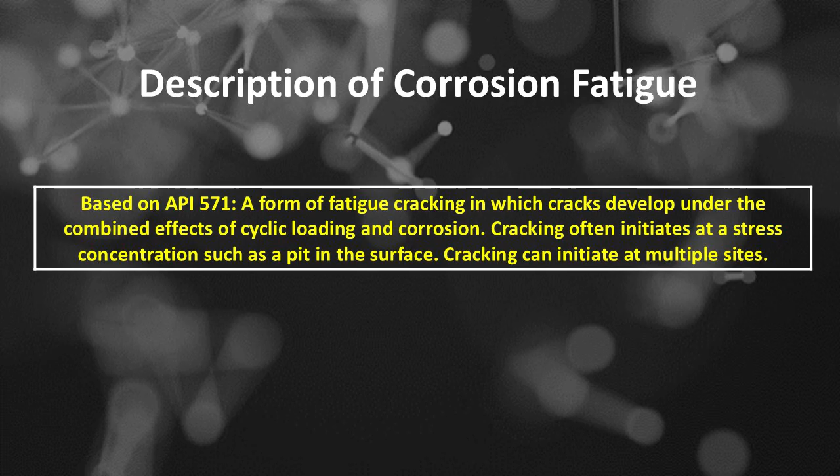Here's a detailed description of corrosion fatigue damage. Definition: corrosion fatigue is a failure mechanism that occurs when a material subjected to cyclic loading, repeated stress or strain, simultaneously experiences corrosive environmental conditions. The combined effect accelerates crack initiation and propagation, leading to premature failure of the material compared to corrosion or fatigue alone. Here is a comprehensive explanation of corrosion fatigue damage.

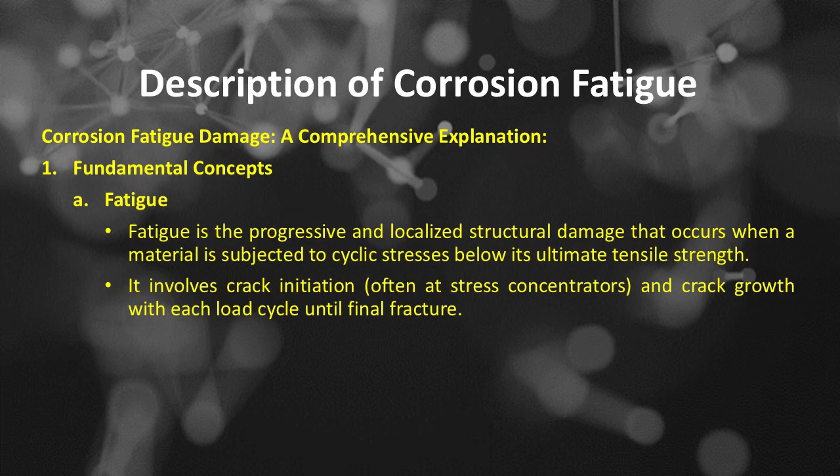Number 1 is fundamental concepts. Fatigue is the progressive and localized structural damage that occurs when a material is subjected to cyclic stresses below its ultimate tensile strength. It involves crack initiation, often at stress concentrators, and crack growth with each load cycle until final fracture. Corrosion involves the chemical or electrochemical deterioration of materials due to environmental interactions, leading to material loss, pitting, or weakening.

Corrosion fatigue is a synergistic process where cyclic stress and corrosive environment interact to accelerate material degradation, resulting in reduced fatigue life and increased likelihood of sudden failure. Number 2 is mechanisms of corrosion fatigue damage. Number A, crack initiation, typically occurs at surface flaws, inclusions, or areas of stress concentration. Corrosive environment exacerbates crack initiation by promoting localized attack, pitting, crevice corrosion, weakening the material's surface layer. Cyclic stresses tend to propagate these flaws into microcracks.

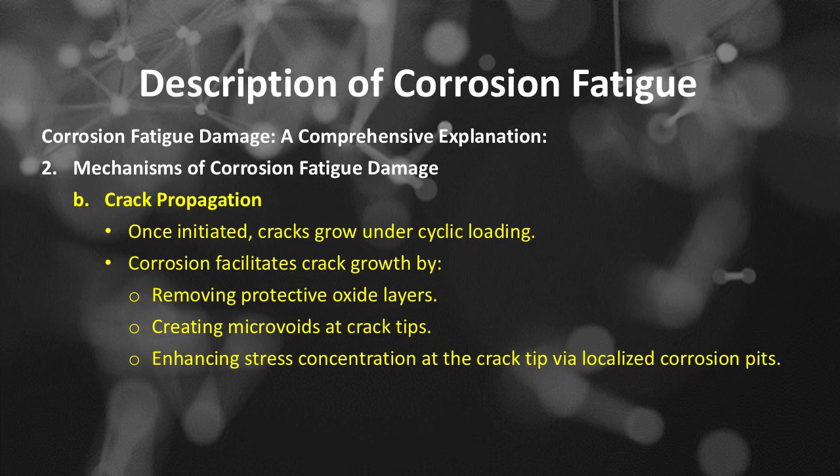Number B, crack propagation. Once initiated, cracks grow under cyclic loading. Corrosion facilitates crack growth by removing protective oxide layers, creating microvoids at crack tips, enhancing stress concentration at the crack tip via localized corrosion pits. Number C, synergistic effect. The presence of corrosion reduces the stress threshold required for crack growth. Cyclic stresses accelerate corrosion processes, and corrosion accelerates fatigue crack growth, creating a feedback loop.

There are some factors influencing corrosion fatigue. Factor number 1 is environment. Its effect is presence of chlorides, acids, or other aggressive agents intensifies damage. Factor number 2 is stress range. Its effect is higher cyclic stress amplitudes accelerate crack growth. Factor number 3 is frequency of loading. Its effect is lower frequencies allow more corrosion to occur per cycle, increasing damage.

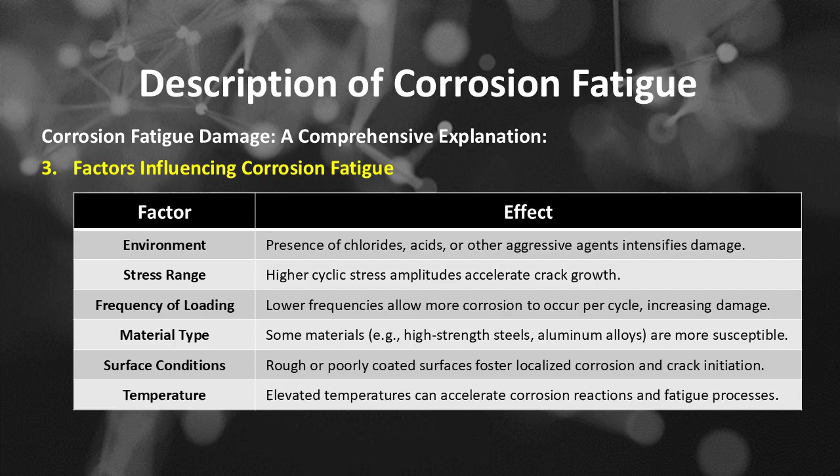Factor number 4 is material type. Its effect is some materials, for example high-strength steels and aluminum alloys, are more susceptible. Factor number 5 is surface conditions. Its effect is rough or poorly coated surfaces foster localized corrosion and crack initiation. And factor number 6 is temperature. Its effect is elevated temperatures can accelerate corrosion reactions and fatigue processes.

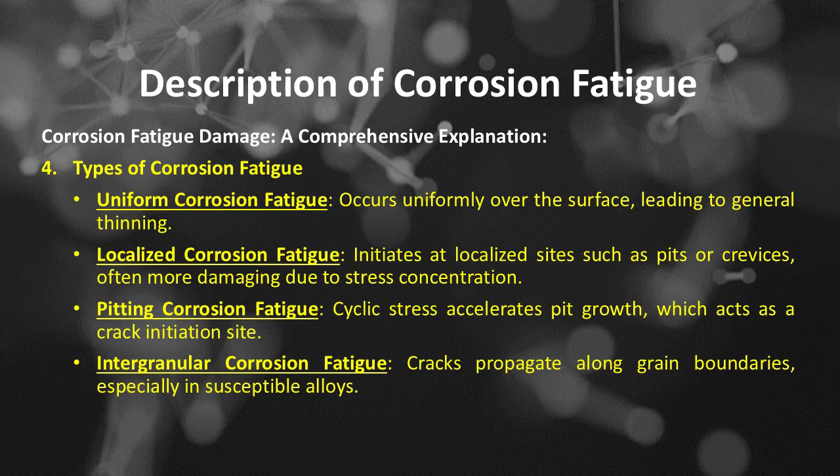Number 4 is types of corrosion fatigue. Uniform corrosion fatigue occurs uniformly over the surface, leading to general thinning. Localized corrosion fatigue initiates at localized sites such as pits or crevices, often more damaging due to stress concentration. Pitting corrosion fatigue: cyclic stress accelerates pit growth, which acts as a crack initiation site. Intergranular corrosion fatigue: cracks propagate along grain boundaries, especially in susceptible alloys.

Number 5 is damage characteristics. Crack initiation sites, often at surface flaws, corrosion pits, or inclusions. Crack growth, accelerated at corrosion sites, often with irregular or scalloped fracture surfaces. Fracture surface features: beach marks indicate incremental growth under cyclic loading. Corrosion products: presence of rust or corrosion deposits on fracture surfaces. Intergranular features: in some alloys, cracks propagate along grain boundaries.

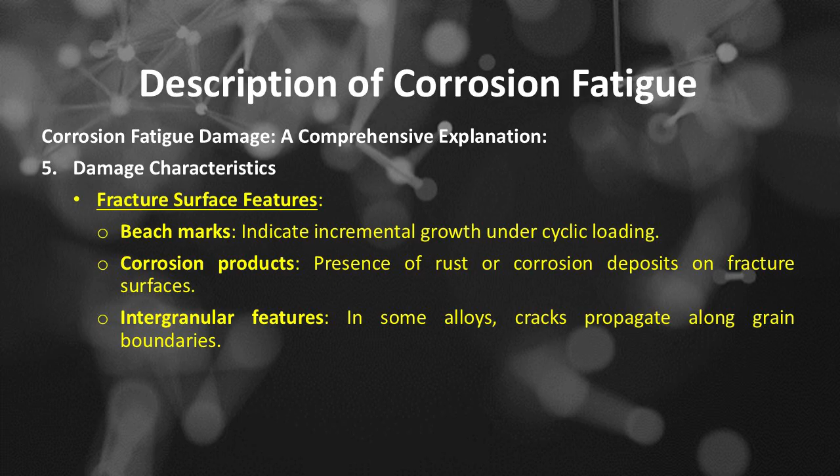Number 6 is detection and analysis using visual inspection, surface corrosion features and crack indication; microscopy, SEM to observe crack morphology and corrosion features at high magnification. Detection and analysis using non-destructive testing, ultrasonic testing, eddy current testing, and detection and analysis using fractography, analysis of fracture surfaces to distinguish between fatigue, corrosion, and combined damage modes.

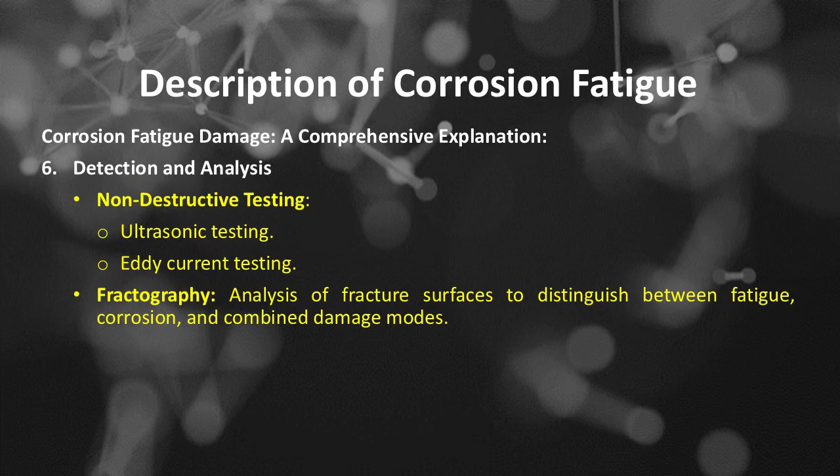Corrosion fatigue is a synergistic failure mechanism involving the interaction of cyclic mechanical stresses and corrosive environments that accelerate crack initiation and growth, often leading to premature failure. It is characterized by surface or subsurface cracks, corrosion pits, and scalloped fracture surfaces, with damage severity depending on environmental conditions, material properties, and loading parameters. Corrosion fatigue based on API 571 affects all metals and alloys.

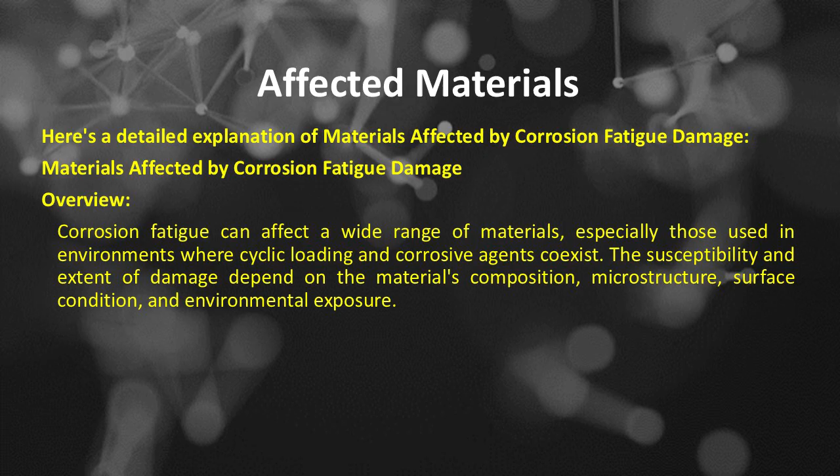Here's a detailed explanation of materials affected by corrosion fatigue damage. Overview: corrosion fatigue can affect a wide range of materials, especially those used in environments where cyclic loading and corrosive agents coexist. The susceptibility and extent of damage depend on the material's composition, microstructure, surface condition, and environmental exposure. Materials affected by corrosion fatigue damage include: number 1 is metals and alloys susceptible to corrosion fatigue.

Number A, steels. The first is carbon steels, commonly used structurally, susceptible to pitting and cracking in chloride environments. High-strength steels are particularly vulnerable due to their high residual stresses and microstructural features. The second is alloy steels, which contain alloying elements, Cr, Ni, Mo, that can improve corrosion resistance but may still suffer in aggressive environments.

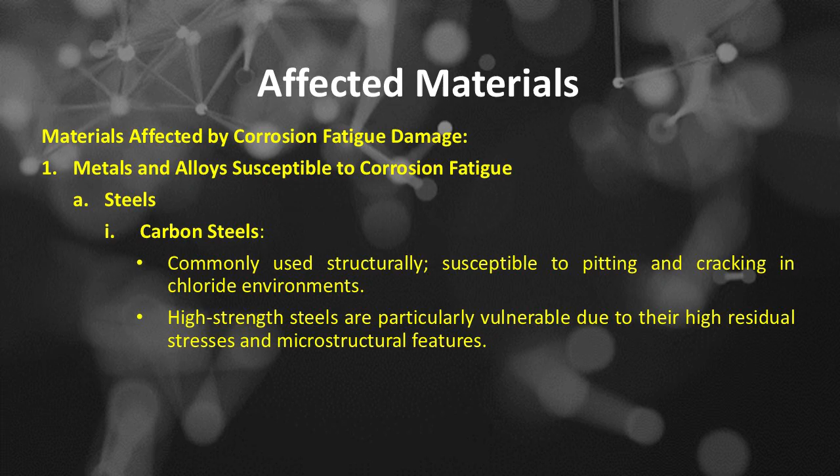The second part of steels is alloy steels, which contain alloying elements, Cr, Ni, Mo, that can improve corrosion resistance but may still suffer in aggressive environments. The third part of steels is stainless steels, generally resistant to corrosion but susceptible to chloride-induced pitting and crevice corrosion, which can initiate fatigue cracks. Types such as 304, 316, and 321 are commonly affected.

Metals and alloys susceptible to corrosion fatigue. Number B is aluminum alloys, widely used in aerospace, marine, and transportation, susceptible to pitting and intergranular corrosion, especially in chloride-rich environments. Fatigue life is significantly reduced when corrosion pits act as crack initiation sites.

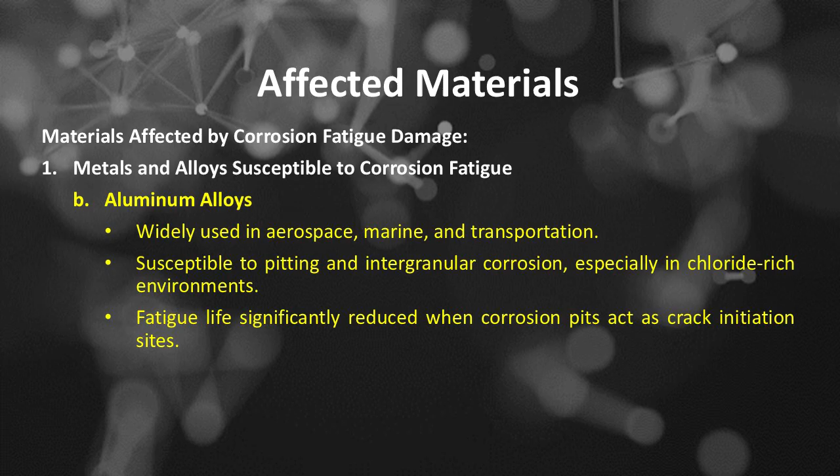Metals and alloys susceptible to corrosion fatigue. Number C is titanium alloys, known for excellent strength-to-weight ratio and corrosion resistance, still vulnerable in highly aggressive environments, especially if surface damage or microstructural defects exist. Pitting and localized corrosion can lead to fatigue failure.

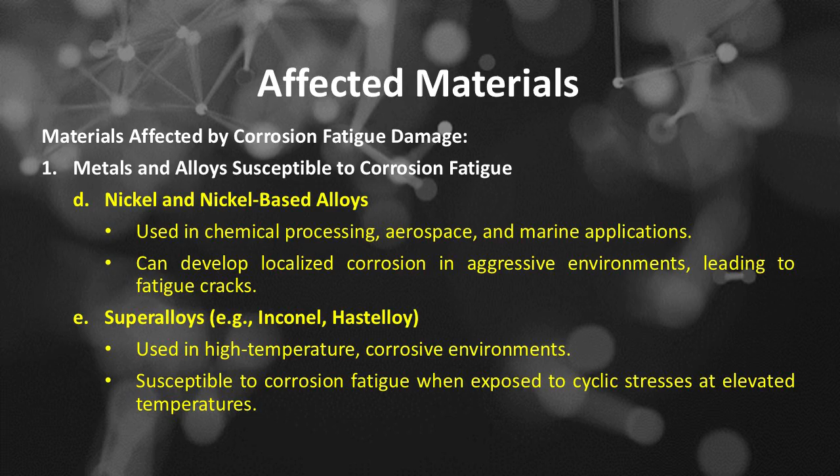Metals and alloys susceptible to corrosion fatigue. Number D is nickel and nickel-based alloys, used in chemical processing, aerospace, and marine applications, which can develop localized corrosion in aggressive environments, leading to fatigue cracks. Metals and alloys susceptible to corrosion fatigue. Number E is superalloys, such as Inconel, Hastelloy, used in high-temperature, corrosive environments. Susceptible to corrosion fatigue when exposed to cyclic stresses at elevated temperatures.

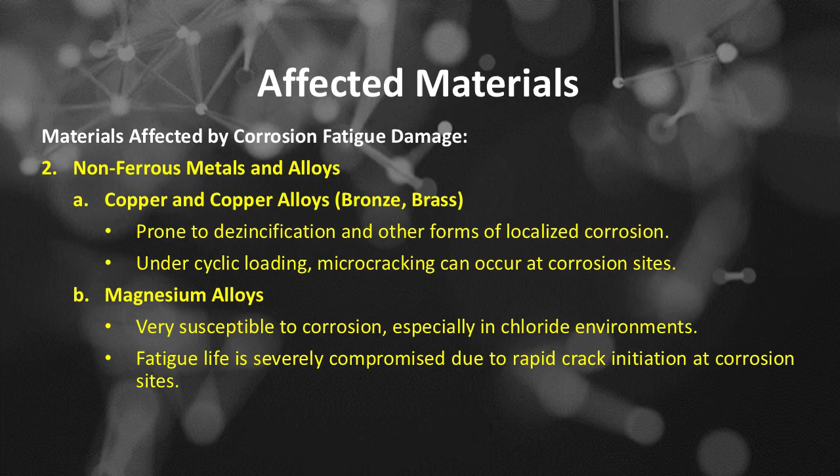Number 2 of materials affected by corrosion fatigue damage is nonferrous metals and alloys, which includes: number A, copper and copper alloys, bronze, brass, prone to dezincification and other forms of localized corrosion. Under cyclic loading, microcracking can occur at corrosion sites. Number B, magnesium alloys, very susceptible to corrosion, especially in chloride environments. Fatigue life is severely compromised due to rapid crack initiation at corrosion sites.

Number 3 of materials affected by corrosion fatigue damage is composite materials and coatings. Fiber-reinforced composites can suffer from environmental degradation at interfaces, leading to delamination and crack growth under cyclic loads. Protective coatings, such as paints, platings, can break down, exposing underlying materials to corrosion and fatigue.

Factors influencing material susceptibility. Factor number 1 is microstructure. Grain size, inclusions, and phase distribution influence crack initiation and propagation. Fine-grained microstructures generally improve fatigue resistance but may be more susceptible to localized corrosion if microstructural inhomogeneities exist. Factor number 2 is alloy composition. Elements like Cr, Ni, Mo enhance corrosion resistance but may introduce microstructural features that influence fatigue crack growth.

Factor number 3 is surface condition. Rough or damaged surfaces harbor corrosion pits that serve as crack initiation points. Factor number 4 is residual stresses. Welding, machining, or forming processes induce residual stresses that promote crack initiation in corrosive environments.

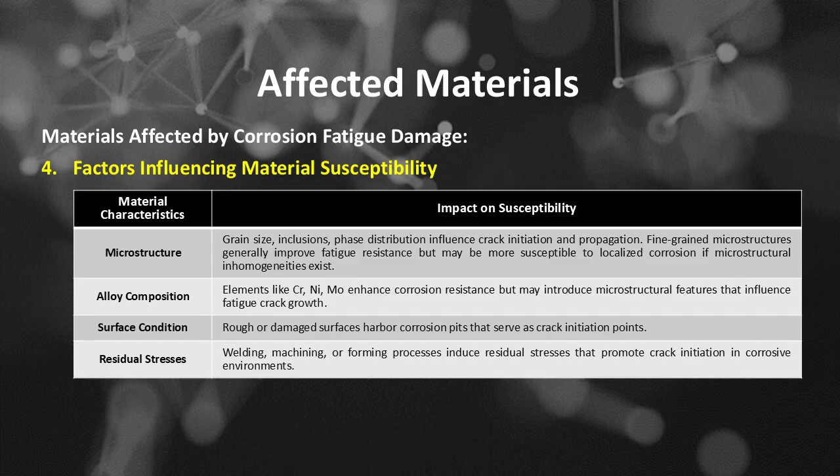Examples of materials commonly affected. Material type number 1 is carbon and low-alloy steels, typically applied to pipelines and structural components, susceptible to damage such as pitting and pitting-induced cracking in chloride environments. Material type number 2 is stainless steels, typically applied to marine structures and chemical plants, susceptible to damage such as pitting, crevice corrosion, and crack initiation at corrosion sites. Material type number 3 is aluminum alloys, typically applied to marine, aerospace, transportation, susceptible to damage such as pitting, intergranular corrosion, and fatigue cracks initiated at pits.

Material type number 4 is titanium alloys, typically applied to marine, aerospace, chemical processing, susceptible to damage such as localized corrosion under certain conditions and fatigue failure at corrosion sites. Material type number 5 is nickel alloys, typically applied to turbines and chemical reactors, susceptible to damage such as corrosion fatigue at high temperatures and aggressive environments.

Materials most vulnerable to corrosion fatigue are those that combine susceptibility to corrosion, due to microstructure, composition, or environment, and susceptibility to fatigue, high cyclic stresses, residual stresses. Commonly affected materials include carbon steels, stainless steels, aluminum alloys, titanium alloys, nickel-based superalloys, and certain non-ferrous metals. Localized corrosion forms, pitting, crevice corrosion, intergranular corrosion, are especially problematic, because they serve as crack initiation sites, dramatically reducing fatigue life.

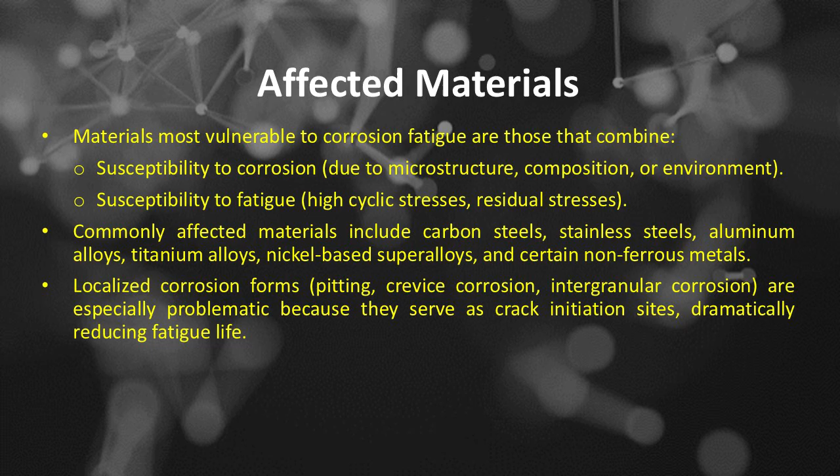Corrosion fatigue critical factors based on API 571. Number A, the critical factors are the material, corrosive environment, cyclic stresses and stress raisers. Number B, cracking is more likely to occur in environments that promote pitting or localized corrosion under cyclic stress due to thermal stress, vibration or differential expansion. Number C, contrary to pure mechanical fatigue, there is no fatigue limit load in corrosion-assisted fatigue. Corrosion promotes failure at a lower stress and number of cycles than the material's normal endurance limit in the absence of corrosion and often results in propagation of multiple parallel cracks.

Number D, crack initiation sites include concentrators such as pits, notches, surface defects, changes in section or fillet welds. Here's a detailed explanation of critical factors of corrosion fatigue damage. Corrosion fatigue is a complex failure process influenced by multiple interacting factors. Understanding these factors is essential for predicting, preventing, and mitigating damage in engineering components exposed to cyclic stresses in corrosive environments. Critical factors of corrosion fatigue damage. Number 1 is environmental conditions.

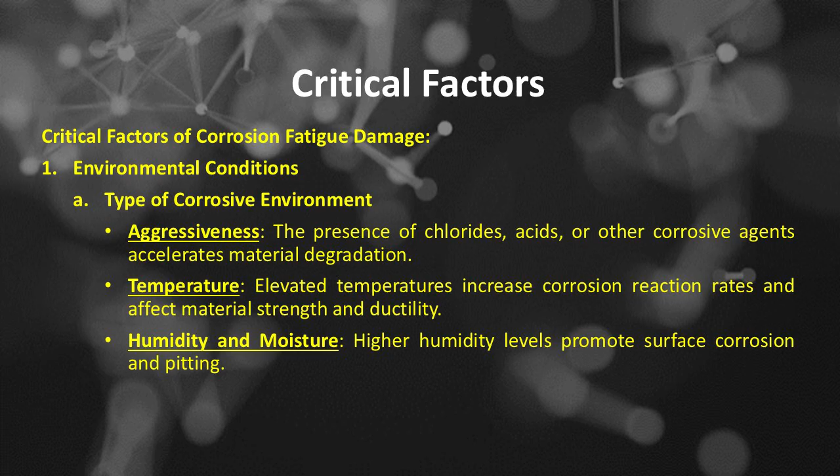Number A, type of corrosive environment, aggressiveness. The presence of chlorides, acids, or other corrosive agents accelerates material degradation. Temperature. Elevated temperatures increase corrosion reaction rates and affect material strength and ductility. Humidity and moisture. Higher humidity levels promote surface corrosion and pitting.

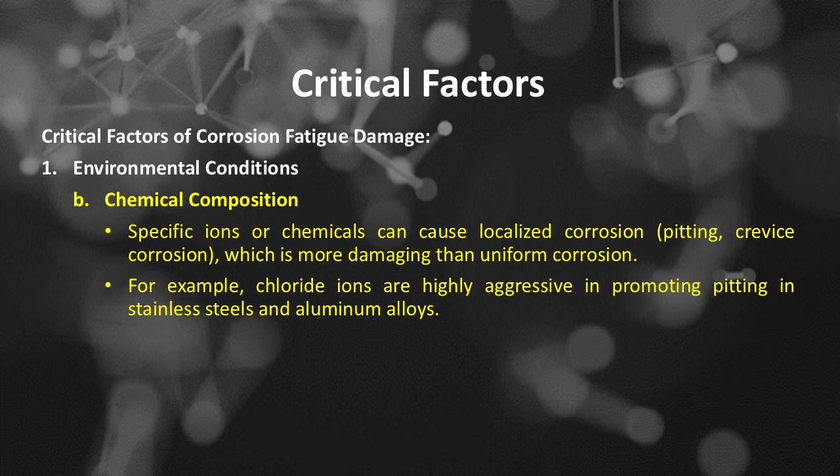Environmental conditions. Number B is chemical composition. Specific ions or chemicals can cause localized corrosion, pitting, crevice corrosion, which is more damaging than uniform corrosion. For example, chloride ions are highly aggressive in promoting pitting in stainless steels and aluminum alloys.

Environmental conditions. Number C is flow conditions. Turbulent flow or fluid movement can remove protective oxide layers, exposing fresh metal surfaces to corrosion. Conversely, stagnant conditions may promote crevice corrosion.

Critical factors of corrosion fatigue damage. Number 2 is mechanical loading parameters. Number A, stress range. The difference between maximum and minimum cyclic stresses influences crack initiation and growth. Higher stress ranges lead to faster crack growth and reduced fatigue life.

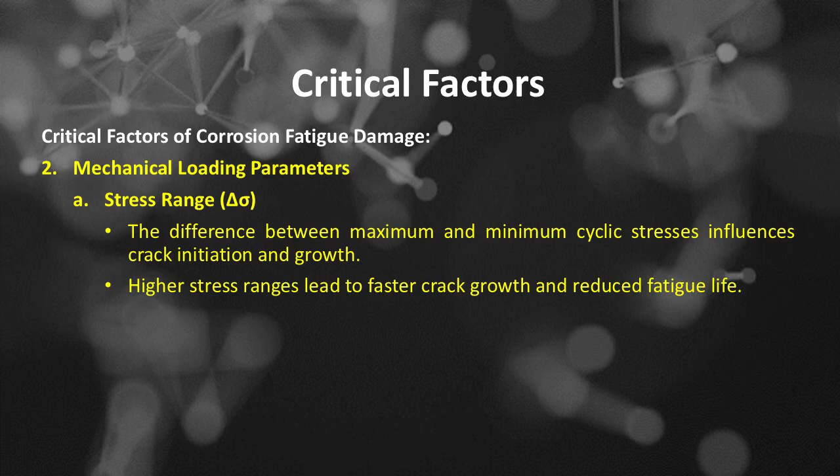Number B, stress concentration. Notches, welds, surface flaws, and geometric discontinuities amplify local stresses. These sites are preferential locations for crack initiation, especially under corrosive attack. Number C of mechanical loading parameters is loading frequency. Low frequency, more time per cycle for corrosion processes to occur, increasing damage. High frequency, less time per cycle for corrosion to act, but the combined effect may still be significant.

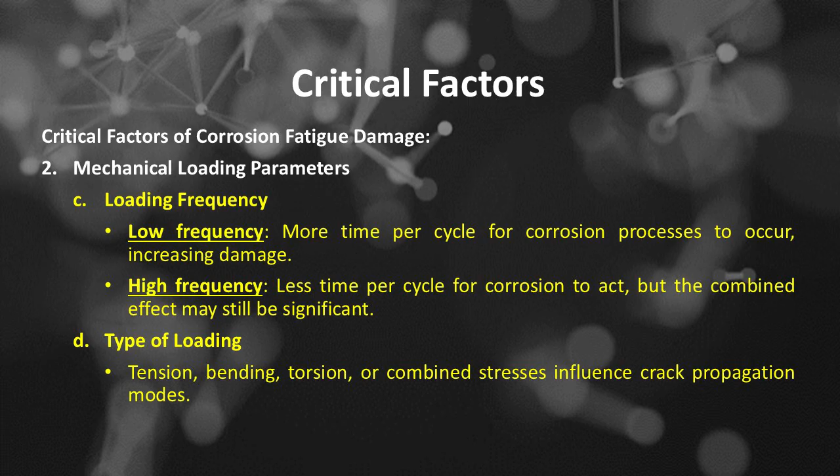And number D of mechanical loading parameters is type of loading. Tension, bending, torsion, or combined stresses influence crack propagation modes. Critical factors of corrosion fatigue damage. Number 3 is material properties. Number A, microstructure, grain size, phase distribution, and inclusion content affect crack initiation sites and pathways. Fine-grained microstructures generally improve resistance but may be vulnerable at microstructural defects.

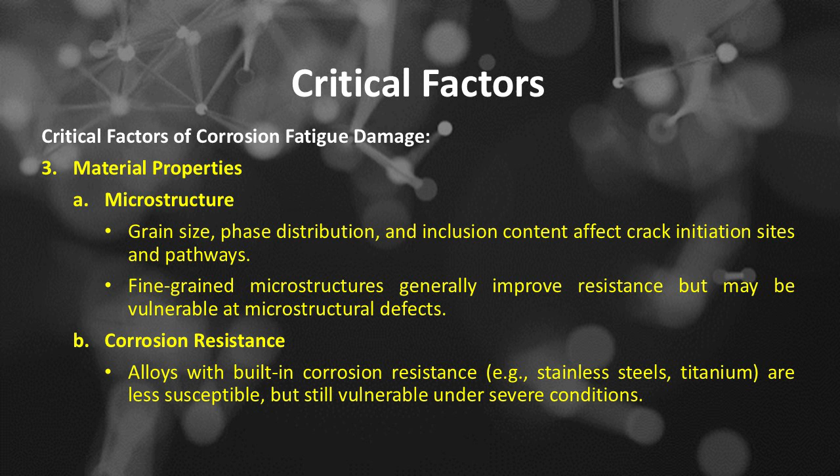Number B, corrosion resistance. Alloys with built-in corrosion resistance, for example stainless steels, titanium, are less susceptible, but still vulnerable under severe conditions. Critical factors of corrosion fatigue damage. Number 3 is material properties. Number C, residual stresses, induced by welding, forming, or machining processes. Residual tensile stresses promote crack initiation and propagation.

Material properties. Number D, hardness and ductility. Harder materials may resist crack growth but could be more brittle and prone to sudden failure. Ductile materials can absorb more energy but may still fail under localized corrosion attack. Critical factors of corrosion fatigue damage. Number 4 is surface condition. Number A, surface finish. Rough or damaged surfaces harbor corrosion pits and stress concentrators. Polished or coated surfaces reduce initiation sites.

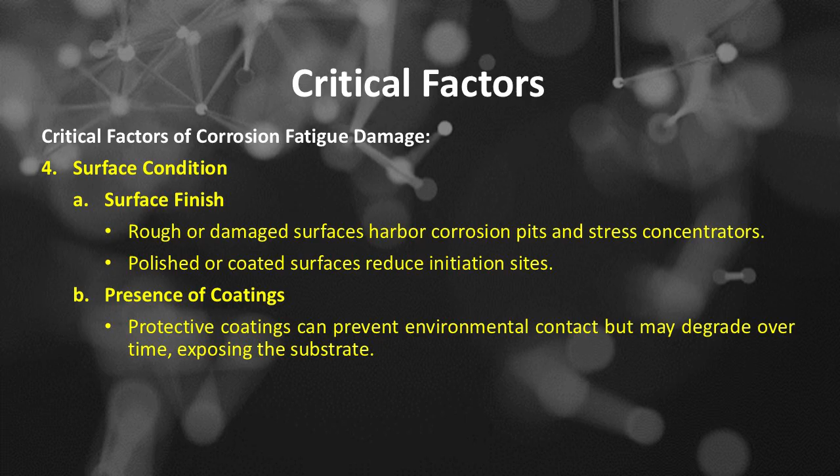Number B, presence of coatings. Protective coatings can prevent environmental contact but may degrade over time, exposing the substrate. Surface condition. Number C, pre-existing flaws, microcracks, inclusions, or corrosion pits act as crack initiation sites under cyclic stresses. Critical factors of corrosion fatigue damage. Number 5 is time and exposure duration. The duration of exposure to corrosive environments influences damage severity. Longer exposure allows more aggressive corrosion processes to develop and propagate cracks.

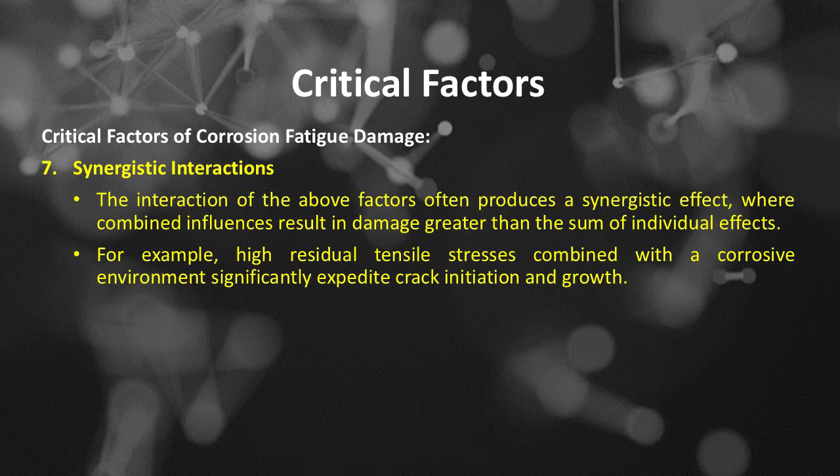Critical factors of corrosion fatigue damage. Number 6 is temperature. Elevated temperatures accelerate both corrosion reactions and material deformation processes. High temperatures may alter microstructure or weaken passive films, increasing susceptibility. Critical factors of corrosion fatigue damage. Number 7 is synergistic interactions. The interaction of the above factors often produces a synergistic effect, where combined influences result in damage greater than the sum of individual effects. For example, high residual tensile stresses combined with a corrosive environment significantly expedite crack initiation and growth.

The critical factors influencing corrosion fatigue damage are interconnected and collectively determine the susceptibility, initiation, and propagation of cracks leading to failure. Effective mitigation relies on understanding and controlling these factors through material selection, design optimization, environmental control, and maintenance practices.

Corrosion fatigue damage affected units or equipment based on API 571: rotating equipment, deaerators and cycling boilers, as well as any equipment subjected to cyclic stresses in a corrosive environment. Some examples include, Number A, rotating equipment. Galvanic couples between the impeller and the pump shaft or other corrosion mechanisms may result in a pitting problem on the shaft. The pitting can act as a stress concentrator or stress riser to promote cracking. Most cracking is transgranular with little branching.

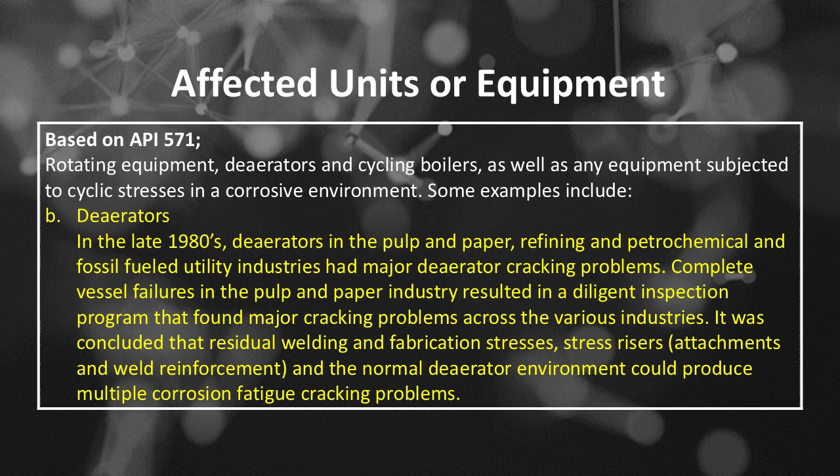Number B, deaerators. In the late 1980s, deaerators in the pulp and paper, refining and petrochemical and fossil-fueled utility industries had major deaerator cracking problems. Complete vessel failures in the pulp and paper industry resulted in a diligent inspection program that found major cracking problems across the various industries. It was concluded that residual welding and fabrication stresses, stress risers, attachments and weld reinforcement, and the normal deaerator environment could produce multiple corrosion fatigue cracking problems.

Number C, cycling boilers. A cycling boiler may see several hundred cold starts over its useful life which, because of differential expansion, continually cracks the protective magnetite scale, allowing corrosion to continue.

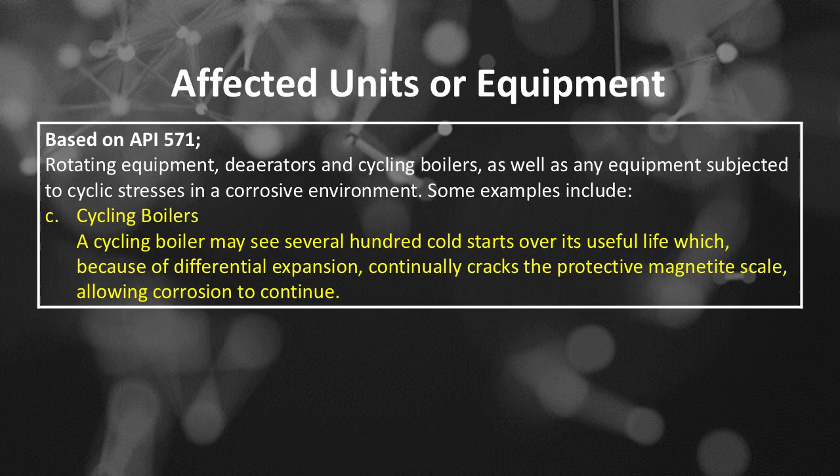Here is a detailed explanation of units or equipment affected by corrosion fatigue damage. Corrosion fatigue can compromise a wide array of structural components and equipment across various industries. Its impact is particularly critical in environments where cyclic stresses and corrosive agents coexist. Understanding which units are vulnerable helps in designing, maintaining, and inspecting these systems effectively. Units and equipment affected by corrosion fatigue damage. Number 1 is aerospace industry.

Number A, aircraft structures, includes: the first is fuselage frames and skin panels, subjected to cyclic aerodynamic loads, susceptible to pitting corrosion, especially in humid or saline environments. The second is wings and spars, which experience repeated bending and torsion. Corrosion pits can initiate cracks leading to fatigue failure.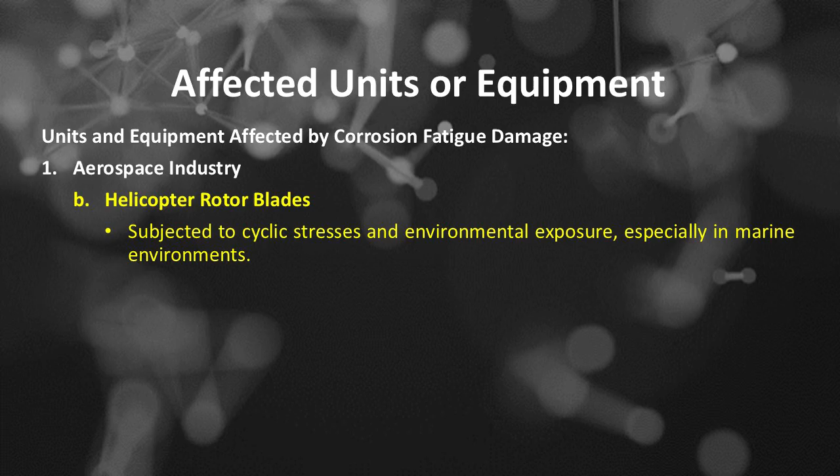Number B of unit or equipment from aerospace industry is helicopter rotor blades, subjected to cyclic stresses and environmental exposure, especially in marine environments. Number 2 of units and equipment affected by corrosion fatigue damage is maritime and offshore structures, includes: number A, ship hulls, continuous cyclic loading from waves, corrosive saltwater environment promotes pitting and cracking.

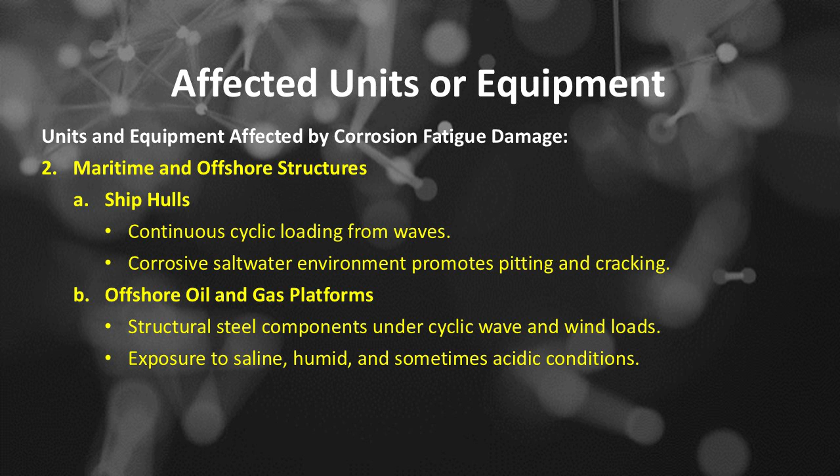Number B, offshore oil and gas platforms, structural steel components under cyclic wave and wind loads, exposure to saline, humid, and sometimes acidic conditions. Maritime and offshore structures equipment. Number C, propellers and shafts, subjected to repetitive stresses; corrosion pits can serve as crack initiation sites, leading to failure.

Number 3 of units and equipment affected by corrosion fatigue damage is automotive and transportation, includes: number A, vehicle frames and chassis, cyclic loading from road vibrations, exposure to road salts and environmental moisture causes corrosion fatigue. Number B, railway tracks and components, repeated stresses from trains; corrosion and fatigue combine to cause cracks and failures.

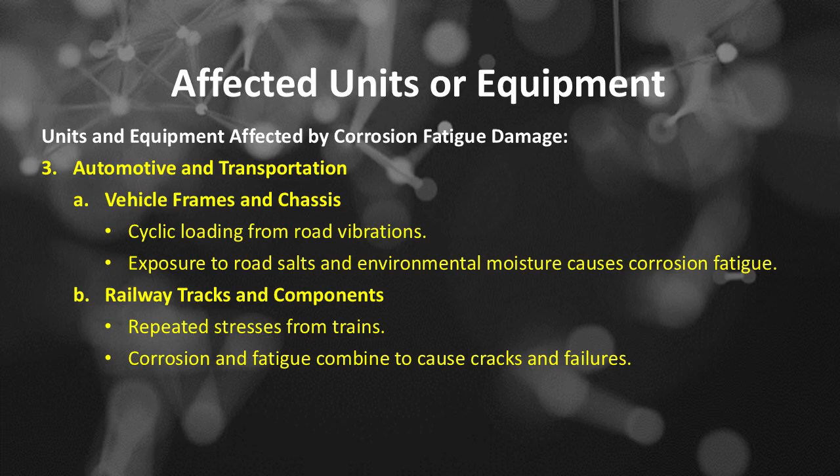Automotive and transportation equipment. Number C, aircraft and train components, similar to aerospace, with emphasis on high-stress parts subject to environmental exposure. Number 4 of units and equipment affected by corrosion fatigue damage is power generation equipment, includes: number A, steam turbine blades and discs, high cyclic stresses at elevated temperatures, corrosive environments from steam and combustion gases.

Number B, nuclear reactor components: piping, pressure vessels, and core components experience cyclic thermal and mechanical stresses. Corrosive coolant environments, water, boric acid solutions, contribute to damage. Power generation equipment. Number C, hydropower turbines, cyclic loading from water flow; corrosive water environments can induce fatigue cracks.

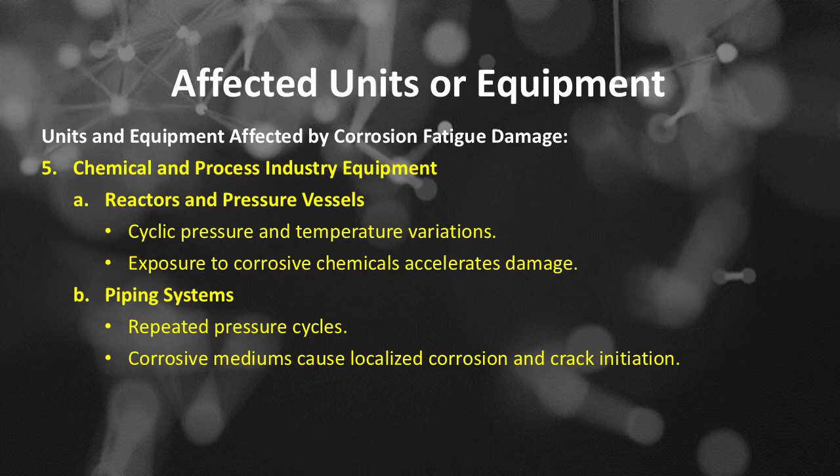Number 5 of units and equipment affected by corrosion fatigue damage is chemical and process industry equipment, includes: number A, reactors and pressure vessels, cyclic pressure and temperature variations, exposure to corrosive chemicals accelerates damage. Number B, piping systems, repeated pressure cycles, corrosive mediums cause localized corrosion and crack initiation. Chemical and process industry equipment. Number C, heat exchangers, cyclic thermal expansion and contraction, corrosive fluids lead to pitting and fatigue failure.

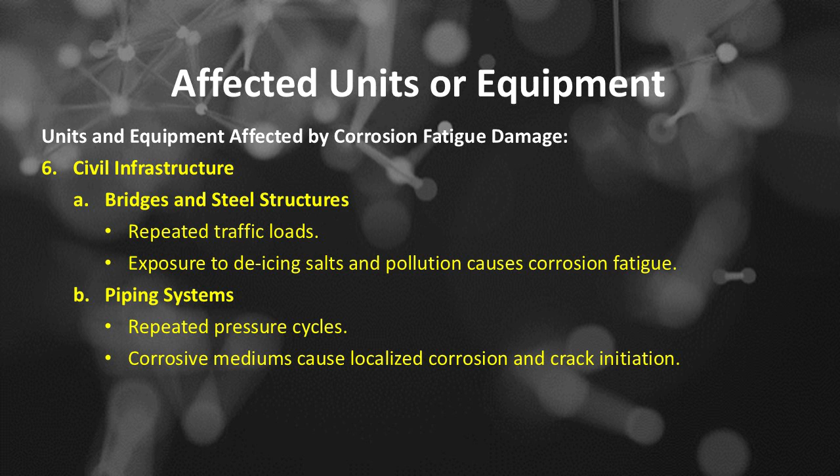Number 6 of units and equipment affected by corrosion fatigue damage is civil infrastructure, includes: number A, bridges and steel structures, repeated traffic loads, exposure to de-icing salts and pollution causes corrosion fatigue. Number B, dam gates and penstocks, cyclic loading from water pressure; corrosion in water-rich environments enhances crack development.

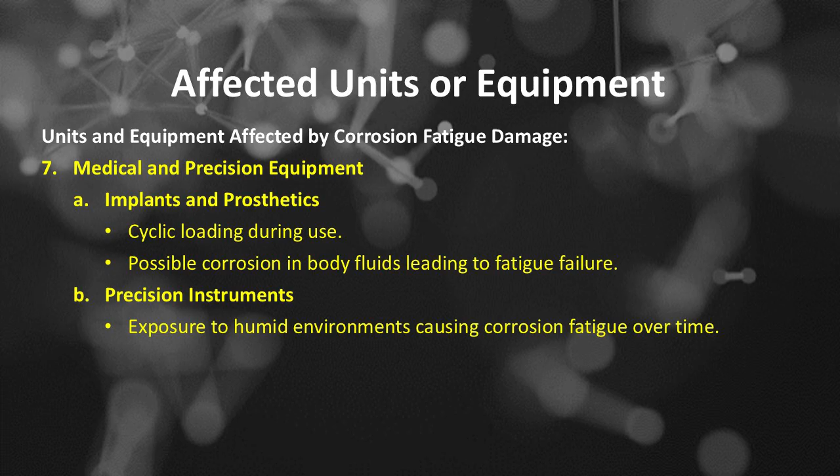Number 7 of units and equipment affected by corrosion fatigue damage is medical and precision equipment, includes: number A, implants and prosthetics, cyclic loading during use, possible corrosion in body fluids leading to fatigue failure. Number B, precision instruments, exposure to humid environments causing corrosion fatigue over time. Corrosion fatigue can affect virtually any unit or equipment subjected to cyclic stresses in a corrosive environment.

Critical areas include structural components of aircraft, ships, and bridges; mechanical parts like turbines, propellers, and gears; pipelines, pressure vessels, and heat exchangers; civil infrastructure components exposed to environmental conditions; specialized equipment in chemical, power, and medical sectors. Mitigation strategies include selecting corrosion-resistant materials, applying protective coatings, designing to minimize stress concentrations, and implementing regular inspection programs.

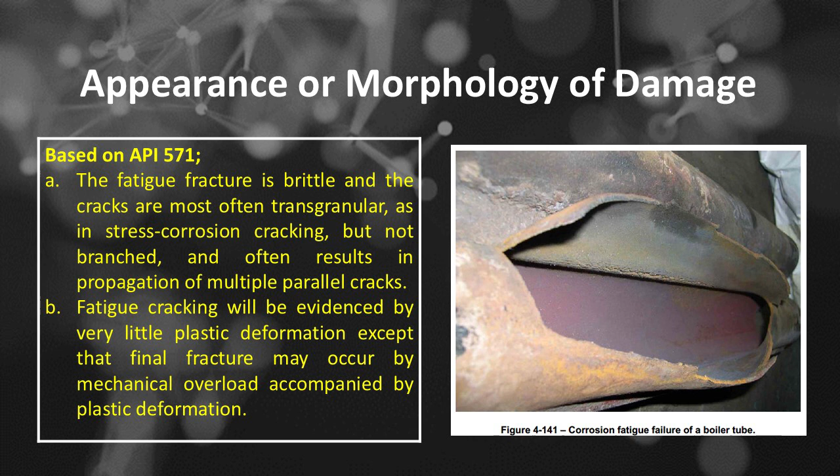Appearance or morphology of corrosion fatigue damage based on API 571. Number A, the fatigue fracture is brittle and the cracks are most often transgranular, as in stress corrosion cracking, but not branched, and often results in propagation of multiple parallel cracks. Number B, fatigue cracking will be evidenced by very little plastic deformation except that final fracture may occur by mechanical overload accompanied by plastic deformation.

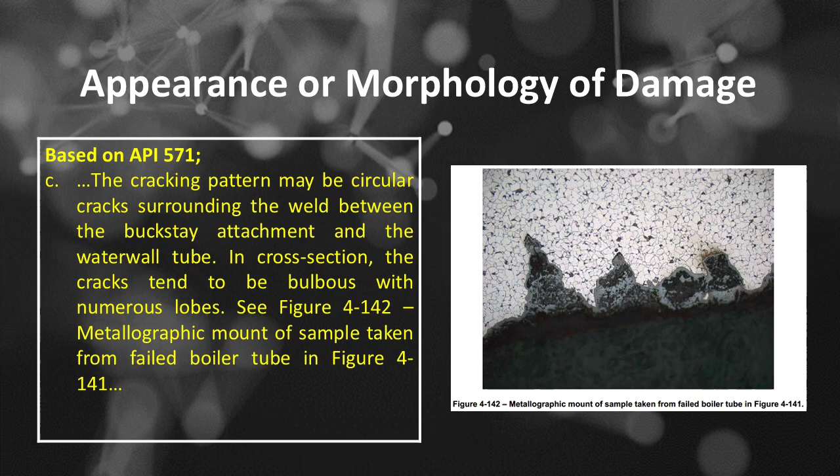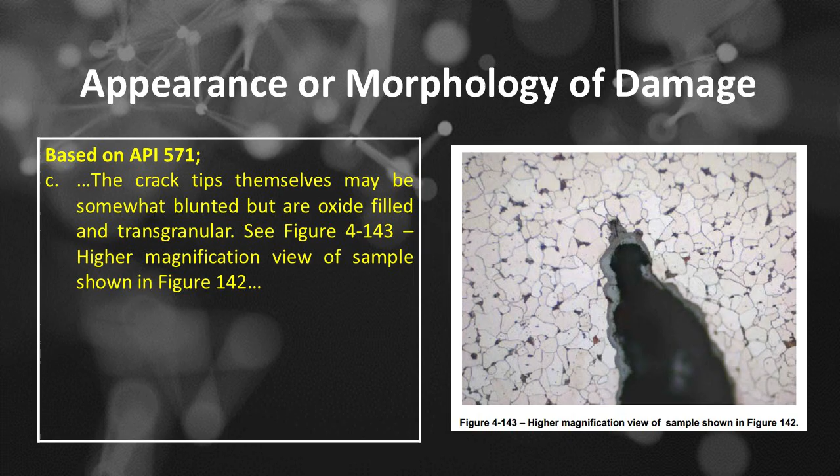See Figure 4-145, photomicrograph showing the crack morphology that is rounded with multiple lobes, and may branch to form rabbit ears. Mag. 25X, etched. Number D, in sulfidizing environments, cracks will have a similar appearance but will be filled with a sulfide scale. Number E, in rotating equipment, most cracking is transgranular with minimal branching.

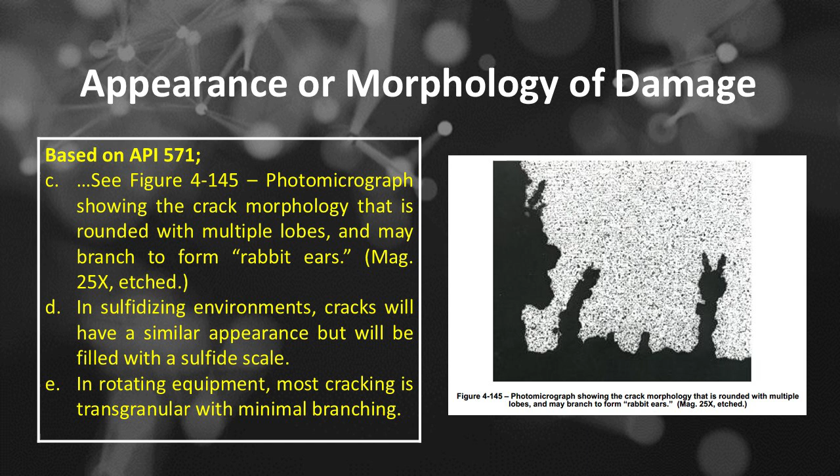Here's a detailed explanation of the appearance or morphology of corrosion fatigue damage. Corrosion fatigue damage manifests in distinct surface and subsurface features that result from the combined effects of cyclic stresses and corrosive environments. Recognizing these features is essential for diagnosing failure modes and implementing preventative measures.

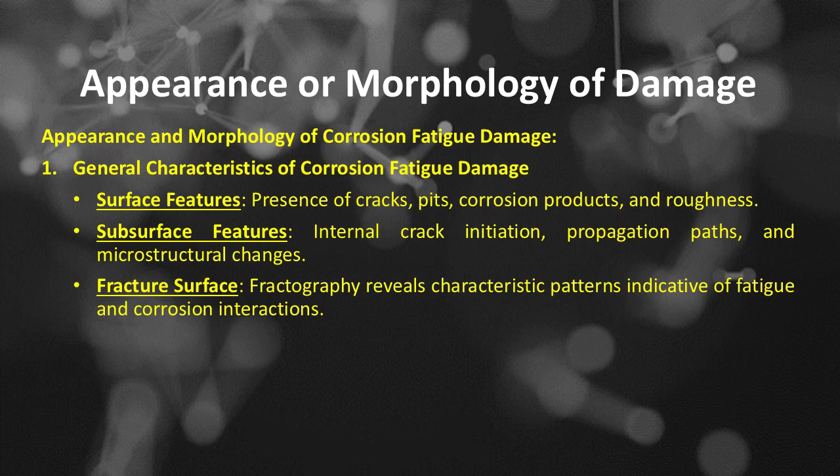Here are a few appearance and morphology features of corrosion fatigue damage. Number 1 is general characteristics of corrosion fatigue damage: surface features, presence of cracks, pits, corrosion products, and roughness; subsurface features, internal crack initiation, propagation paths, and microstructural changes; fracture surface. Fractography reveals characteristic patterns indicative of fatigue and corrosion interactions.

Number 2 is surface morphology features, includes number A, corrosion pits. Description: localized, often hemispherical cavities caused by localized corrosion, pitting. Appearance: small to large cavities with sharp or rounded edges. Pits often serve as crack initiation sites, can be covered with corrosion products, rust, oxides. Significance: initiation points for fatigue cracks, especially in aggressive environments.

Number B, crack initiation sites. Description: microcracks typically originate at corrosion pits, inclusions, or surface flaws. Appearance: tiny, often circular or irregular cracks emerging from pits, may be difficult to detect without microscopic examination. Progression: microcracks grow under cyclic loads, eventually coalescing into macrocracks.

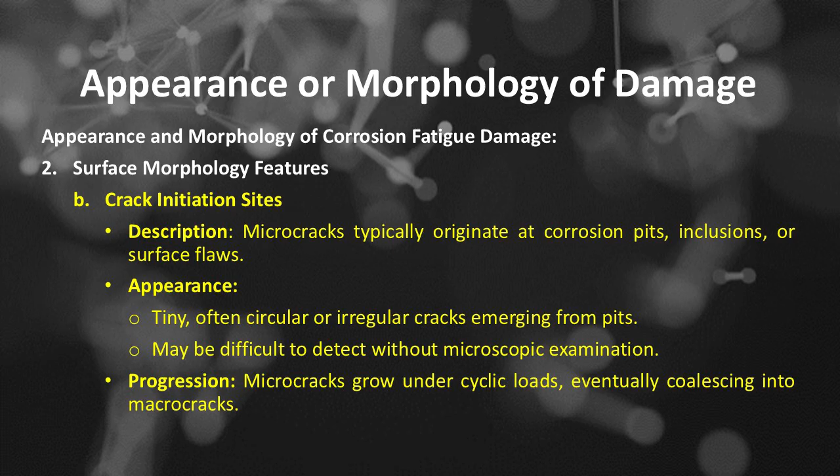Number C, corrosion products and deposits. Description: accumulations of rust, oxides, or other corrosion products. Appearance: flaky, granular, or crusty deposits on the surface, can obscure underlying cracks or pits. Impact: may promote further corrosion or crack propagation.

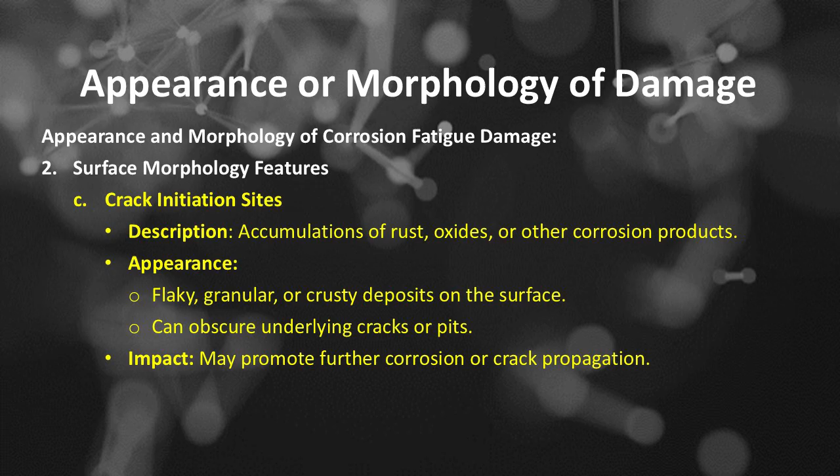Number D, surface roughness and striations. Description: striations are fine, parallel lines on fracture surfaces indicating cyclic crack growth. Appearance: regular, rippled patterns near crack tips, increased roughness in areas of corrosion-related damage. Significance: indicates fatigue crack growth mechanisms.

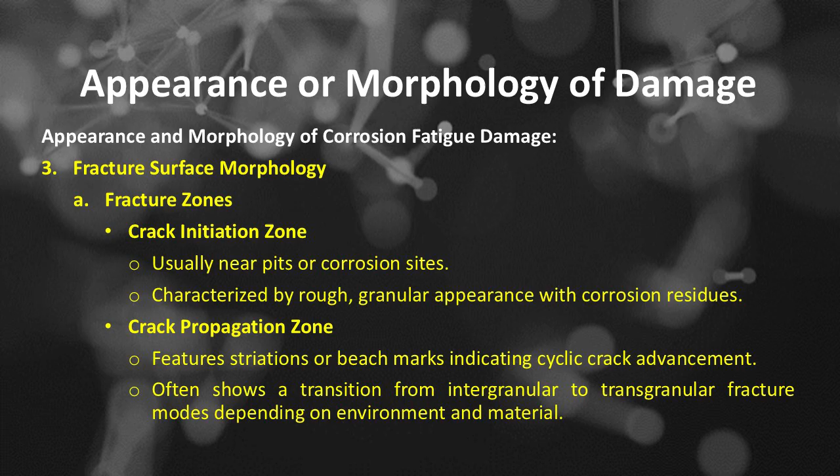Number 3 is fracture surface morphology, includes number A, fracture zones. The first is the crack initiation zone, usually near pits or corrosion sites, characterized by rough, granular appearance with corrosion residues. The second is the crack propagation zone, features striations or beach marks indicating cyclic crack advancement. Often shows a transition from intergranular to transgranular fracture modes depending on environment and material. The final fracture zone: ductile or brittle appearance, fracture surface becomes smoother or shows dimpled features in ductile failures.

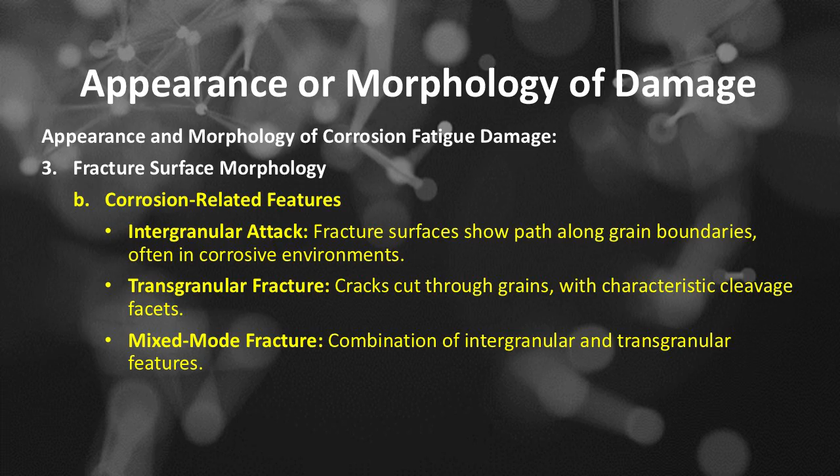Number B of fracture surface morphology is corrosion-related features. The first is intergranular attack: fracture surfaces show path along grain boundaries, often in corrosive environments. The second is transgranular fracture: cracks cut through grains, with characteristic cleavage facets. The third is mixed mode fracture, combination of intergranular and transgranular features. Number C is microcracks and crack coalescence: multiple microcracks often originate from pits or inclusions. Coalescence of microcracks leads to macrocrack formation, visible as rough, irregular fracture features.

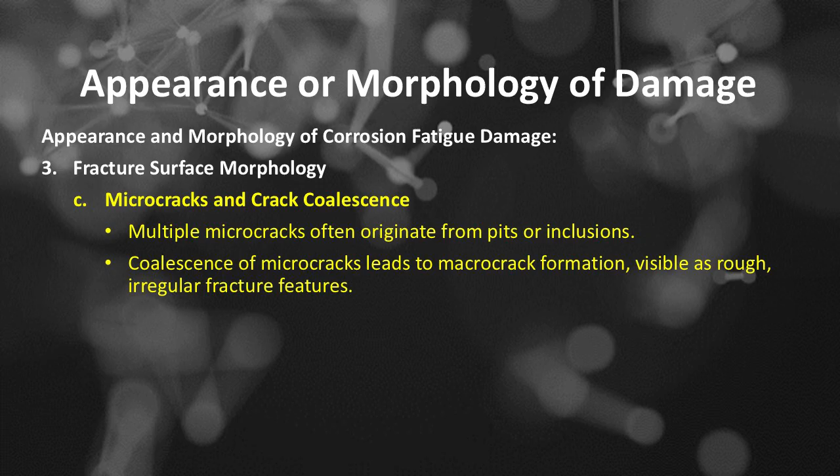Number 4 is subsurface damage features. Internal microcracks initiate beneath the surface at corrosion pits or inclusions. Crack growth path usually follows microstructural features like grain boundaries or inclusions, accelerated by corrosive attack weakening the material. Number 5 is visual recognition of corrosion fatigue morphology: pitted surface with crack initiation sites, rough, granular fracture surface with striations, corrosion deposits or rust layers, presence of intergranular or transgranular features depending on the material and environment.

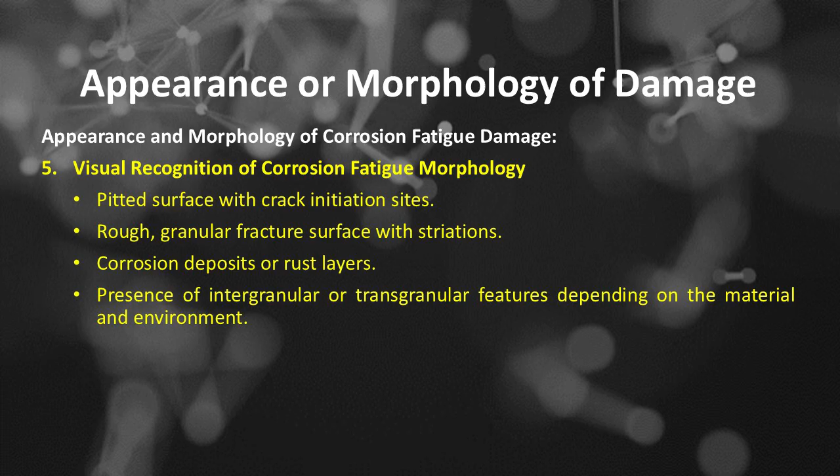Corrosion fatigue damage presents with distinct surface and subsurface features. On the surface: corrosion pits acting as crack initiation sites, crack initiation zones near pits or flaws, fracture surfaces showing striations, beach marks, and corrosion deposits. In the subsurface: microcracks originating within corrosion pits, crack coalescence leading to macrocracks, internal corrosion-induced weakening. Recognizing these morphological features helps in diagnosing failure modes, understanding the progression of damage, and developing strategies for prevention.

Corrosion fatigue damage prevention and mitigation based on API 571. Number A, for rotating equipment, modify the corrosive environment by using coatings and/or inhibitors. Minimize galvanic couple effects. Use more corrosion-resistant materials. Number B, for deaerators, proper feed water and condensate chemical control. Minimize residual welding and fabrication stresses through PWHT. Minimize weld reinforcement by grinding weld contours smooth. Number C, cycling boilers, start up slowly to minimize the differential expansion strains. Always start up with the chemistry of the boiler water under proper control.

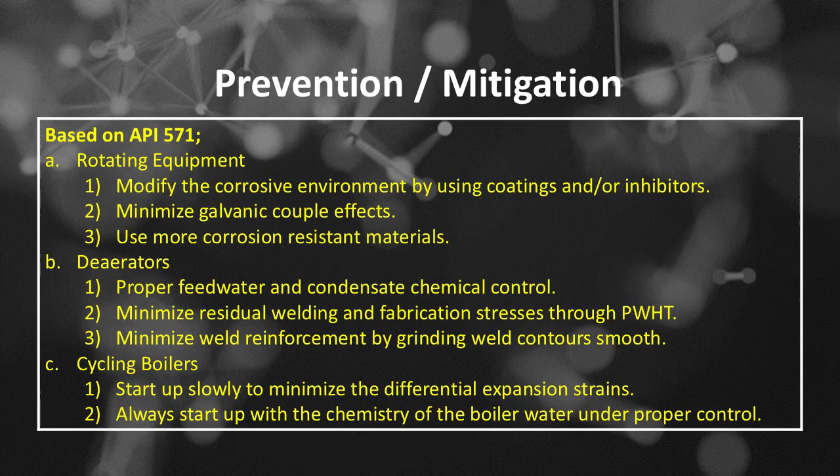Here's a comprehensive and detailed explanation of prevention and mitigation strategies for corrosion fatigue damage. Corrosion fatigue combines the damaging effects of cyclic stress and corrosive environments, leading to crack initiation and propagation that can culminate in catastrophic failure. Preventing or mitigating such damage involves a multifaceted approach, integrating material selection, design strategies, environmental control, and maintenance practices. Here is a comprehensive, detailed explanation of prevention and mitigation of corrosion fatigue damage.

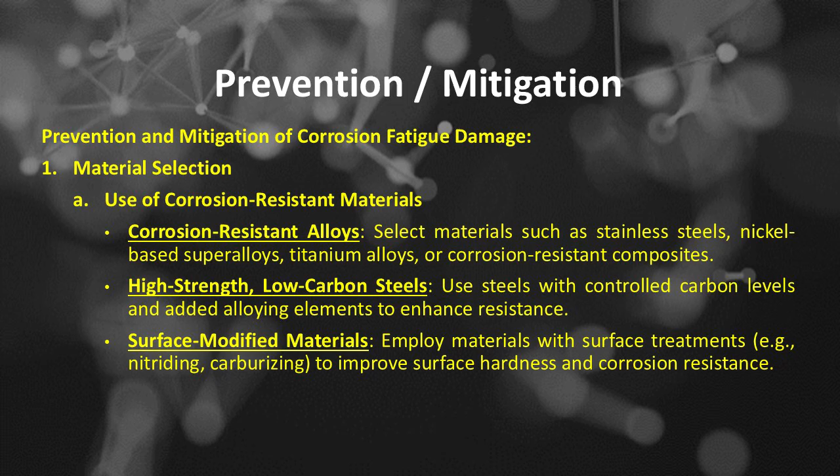Number 1 is material selection. A, use of corrosion-resistant materials: corrosion-resistant alloys, select materials such as stainless steels, nickel-based superalloys, titanium alloys, or corrosion-resistant composites. High-strength, low-carbon steels: use steels with controlled carbon levels and added alloying elements to enhance resistance. Surface-modified materials: employ materials with surface treatments, for example nitriding, carburizing, to improve surface hardness and corrosion resistance.

Number B of material selection is microstructural control. Refined grain size: fine grains impede crack initiation and propagation. Inclusions and defects management: minimize nonmetallic inclusions and impurities that act as crack initiation sites.

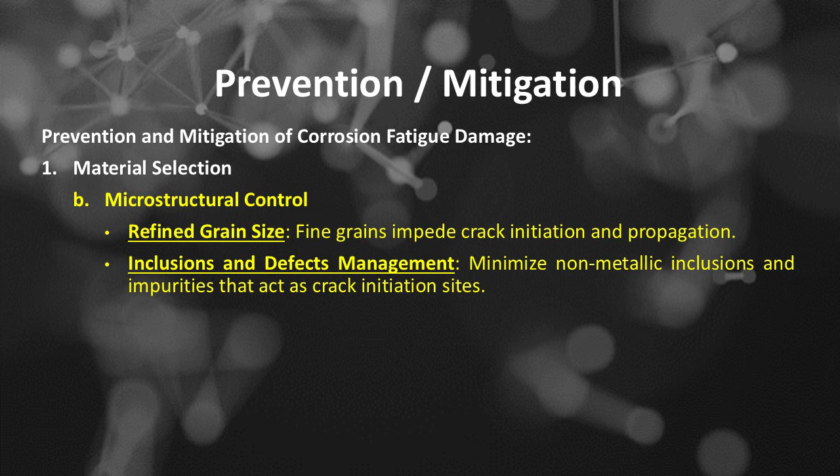Number 2 of prevention and mitigation of corrosion fatigue damage is protective coatings and surface treatments. A, coatings: paints, epoxies, and polymer coatings provide a barrier against corrosive agents. Metallic coatings, such as galvanization, zinc coating, cadmium plating, or nickel plating, which protect underlying metal. Ceramic and composite coatings for high temperature and aggressive environments.

Number B of protective coatings and surface treatments is surface treatments. Anodizing creates a protective oxide layer. Passivation enhances corrosion resistance, especially in stainless steels. Shot peening induces residual compressive stresses on the surface, reducing crack initiation susceptibility.

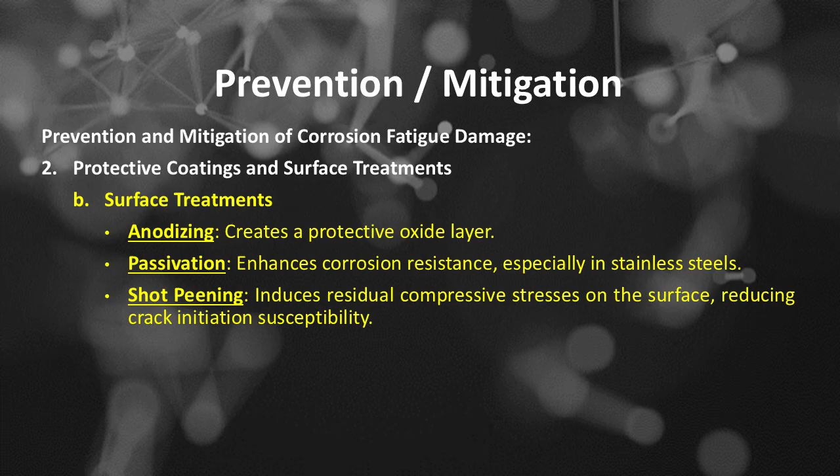Number 3 of prevention and mitigation of corrosion fatigue damage is design modifications. A, stress reduction: reduce stress concentrations, avoid sharp corners, notches, and abrupt changes in cross-section. Optimize load distribution, use smoother transitions and generous radii. Control stress levels, designed to operate below fatigue limit thresholds where possible.

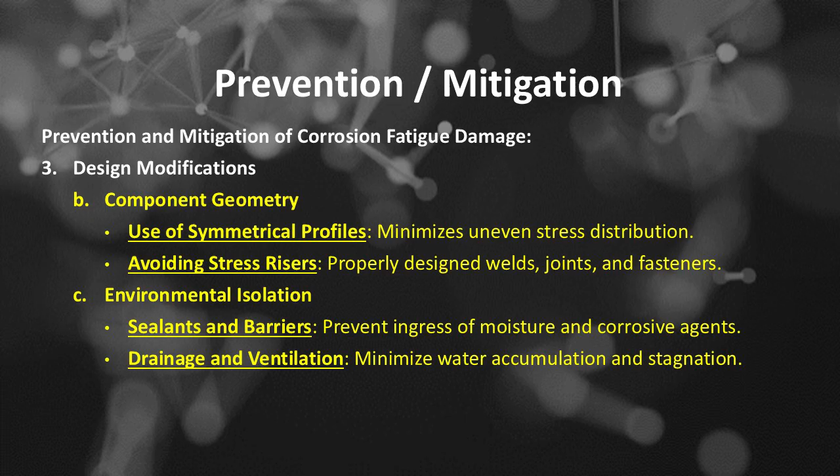Number B of design modifications is component geometry. Use of symmetrical profiles minimizes uneven stress distribution. Avoiding stress risers: properly designed welds, joints, and fasteners. Number C of design modifications is environmental isolation. Sealants and barriers prevent ingress of moisture and corrosive agents. Drainage and ventilation minimize water accumulation and stagnation.

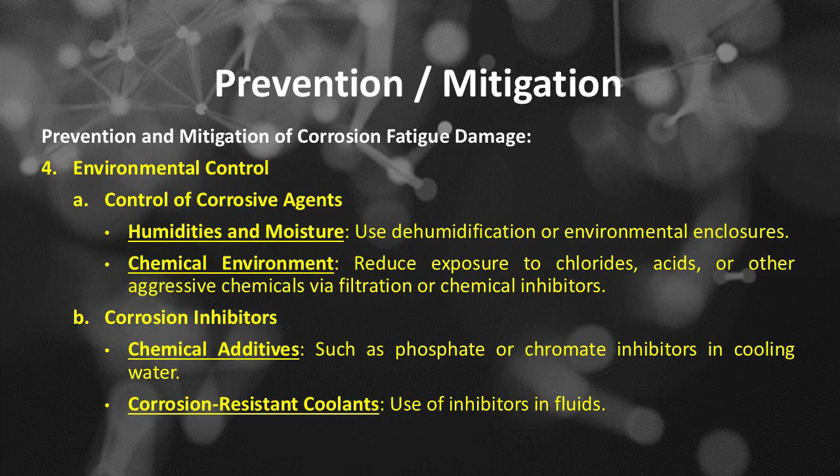Number 4 of prevention and mitigation of corrosion fatigue damage is environmental control. A, control of corrosive agents: humidity and moisture, use dehumidification or environmental enclosures. Chemical environment: reduce exposure to chlorides, acids, or other aggressive chemicals via filtration or chemical inhibitors. B, corrosion inhibitors: chemical additives, such as phosphate or chromate inhibitors in cooling water, corrosion-resistant coolants, use of inhibitors in fluids.

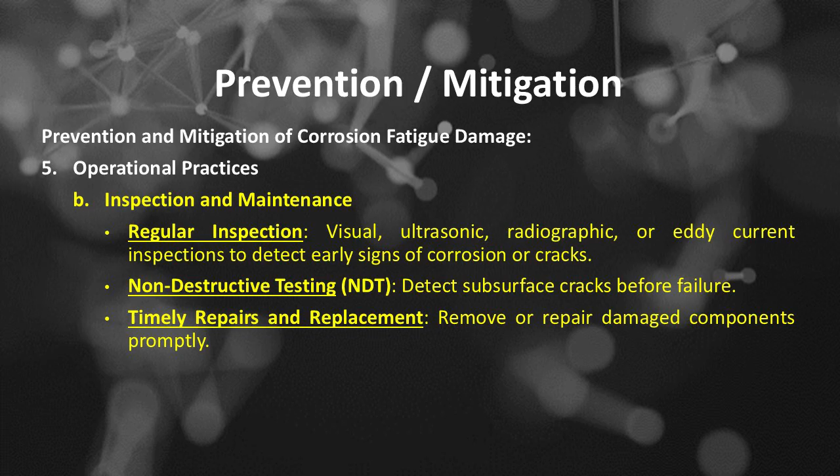Number 6 of prevention and mitigation of corrosion fatigue damage is cathodic protection. Principle of cathodic protection: apply a cathodic current to the metal surface to prevent anodic, corrosive, reactions. Cathodic protection methods: sacrificial anodes, use of zinc, magnesium, or aluminum anodes; impressed current systems, an external power source applies protective current.

Number 7 of prevention and mitigation of corrosion fatigue damage is corrosion inhibitors and chemical treatments. Surface coatings with inhibitors: incorporate inhibitors into paints or coatings. Inhibitor dosing: regular addition of corrosion inhibitors in cooling or process waters.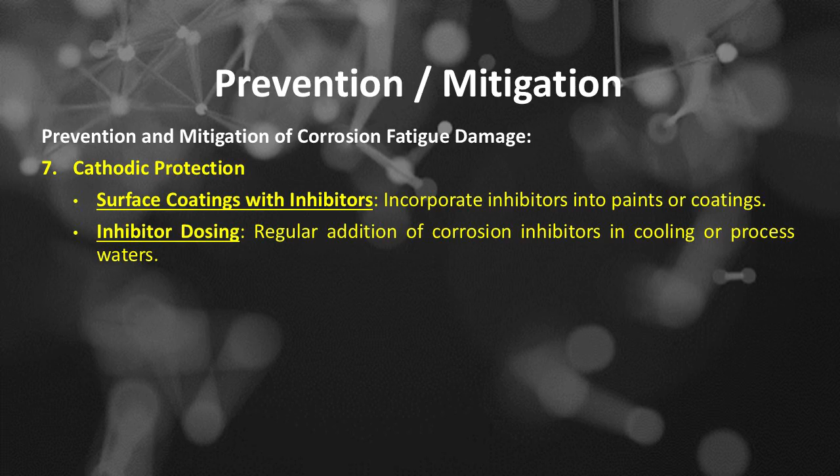Effective prevention and mitigation of corrosion fatigue involve an integrated approach combining material science, engineering design, environmental management, and maintenance protocols. Prevention begins at the design phase, emphasizing corrosion-resistant materials and stress optimization, and continues through operational practices and regular inspection. Implementing these measures significantly extends the service life of components, enhances safety, and reduces maintenance costs.

Corrosion fatigue damage prevention and mitigation based on API 571. A, for rotating equipment, UT and MT techniques can be used for crack detection. B, for deaerators, cracking is generally detected with WFMT inspection. Many of the cracks are very tight and difficult to detect.

C, cycling boilers: the first sign of damage is usually a pinhole leak on the cold side of a waterwall tube at a buckstay attachment. Inspect highly stressed regions in the boiler by UT or EMATs techniques. Cracking may occur at the membranes in the highly stressed regions, particularly corners at buckstays.

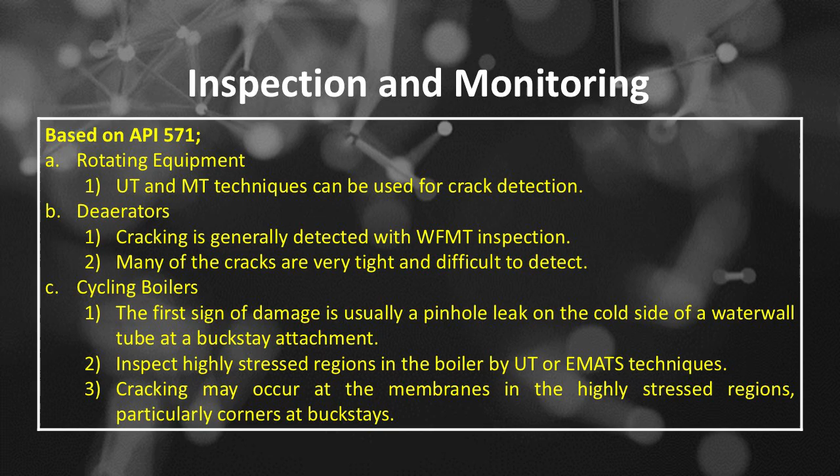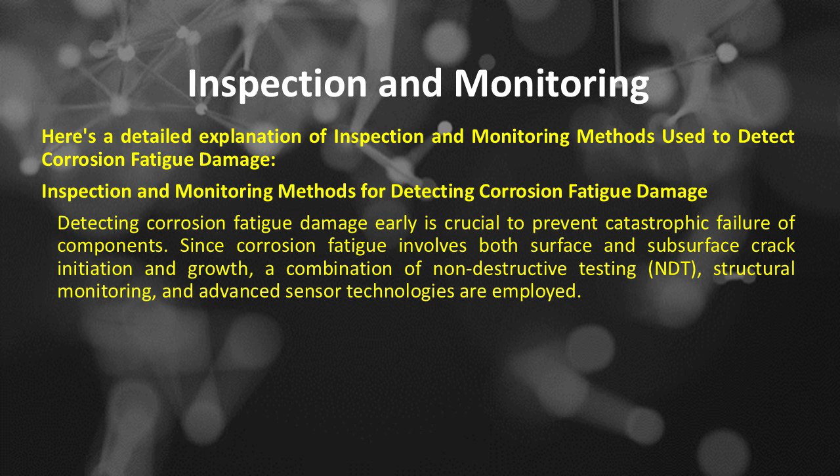Here's a detailed explanation of inspection and monitoring methods used to detect corrosion fatigue damage. Detecting corrosion fatigue damage early is crucial to prevent catastrophic failure of components. Since corrosion fatigue involves both surface and subsurface crack initiation and growth, a combination of non-destructive testing (NDT), structural monitoring, and advanced sensor technologies are employed. Here's a detailed overview of inspection and monitoring methods for detecting corrosion fatigue damage.

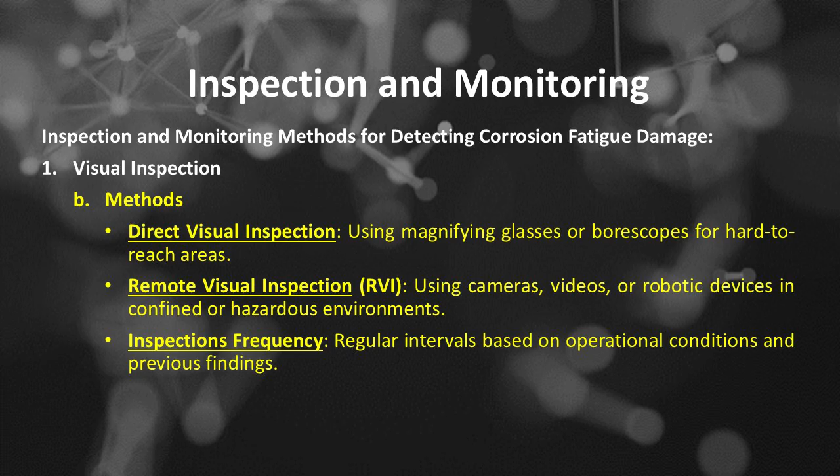Number 1 is visual inspection. Its purpose is to identify surface anomalies such as corrosion pits, cracks, discoloration, and surface roughness. Visual inspection methods: direct visual inspection, using magnifying glasses or borescopes for hard-to-reach areas; remote visual inspection (RVI), using cameras, videos, or robotic devices in confined or hazardous environments; inspection frequency, regular intervals based on operational conditions and previous findings. The limitation of visual inspection is that it cannot detect subsurface cracks or internal corrosion.

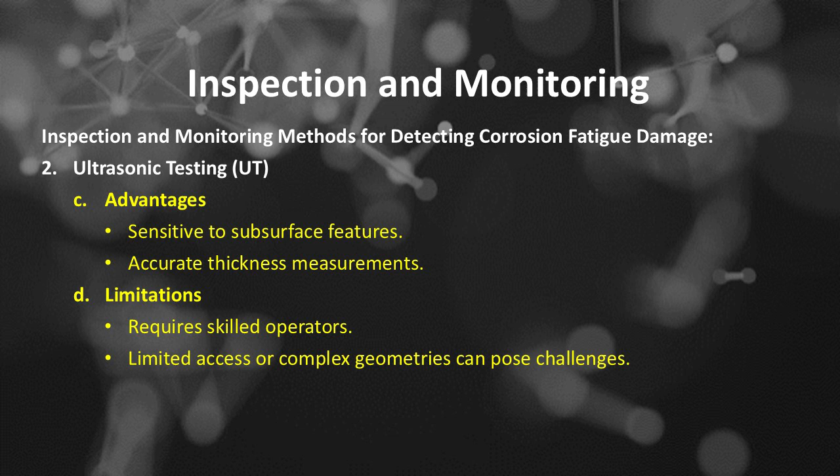Number 2 of inspection and monitoring methods for detecting corrosion fatigue damage is ultrasonic testing, or UT. The principle of UT is that it uses high-frequency sound waves to detect internal flaws and measure wall thickness. UT is applied to detect internal microcracks, corrosion thinning, and crack growth beneath the surface. Two UT methods are the pulse echo method, which detects reflections from flaws or corrosion pits, and phased array ultrasonics, which enables detailed imaging of flaw geometry. The advantages of UT include sensitivity to subsurface features and accurate thickness measurements. Limitations of UT include requiring skilled operators, and limited access or complex geometries can pose challenges.

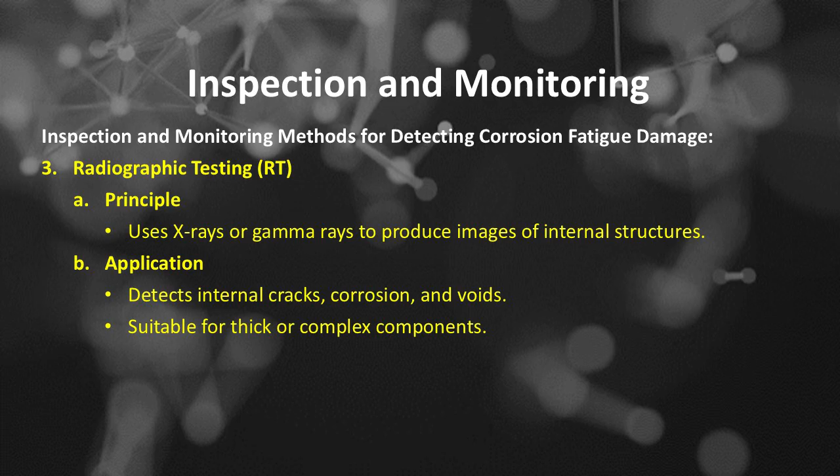Number 3 of inspection and monitoring methods for detecting corrosion fatigue damage is radiographic testing, RT. The principle of RT is that it uses X-rays or gamma rays to produce images of internal structures. RT is applied to detect internal cracks, corrosion, and voids, and is suitable for thick or complex components. The advantages of RT include detailed internal images, and it is good for weld inspections and internal flaws. Limitations of RT include required safety precautions, and it is costly and time-consuming.

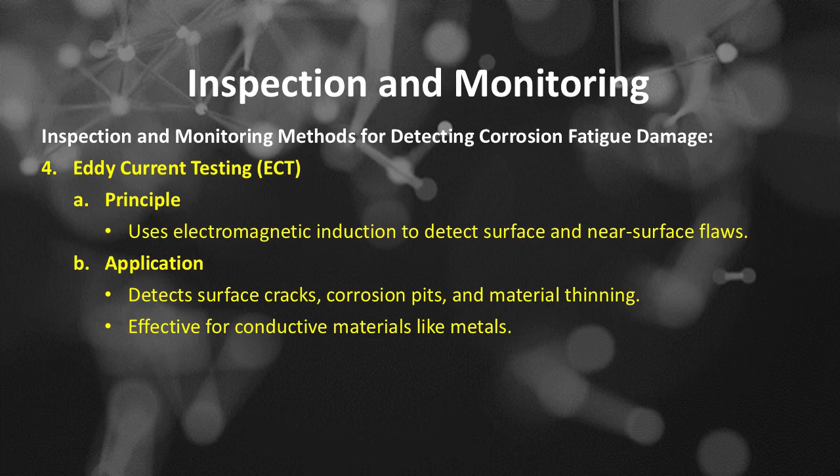Number 4 of inspection and monitoring methods for detecting corrosion fatigue damage is eddy current testing, ECT. The principle of eddy current testing is that it uses electromagnetic induction to detect surface and near-surface flaws. Eddy current testing is applied to detect surface cracks, corrosion pits, and material thinning, and is effective for conductive materials like metals. The advantages of eddy current testing include being rapid and sensitive to small surface flaws, and portable equipment. Limitations of eddy current testing include limited penetration depth, and it is less effective on complex geometries.

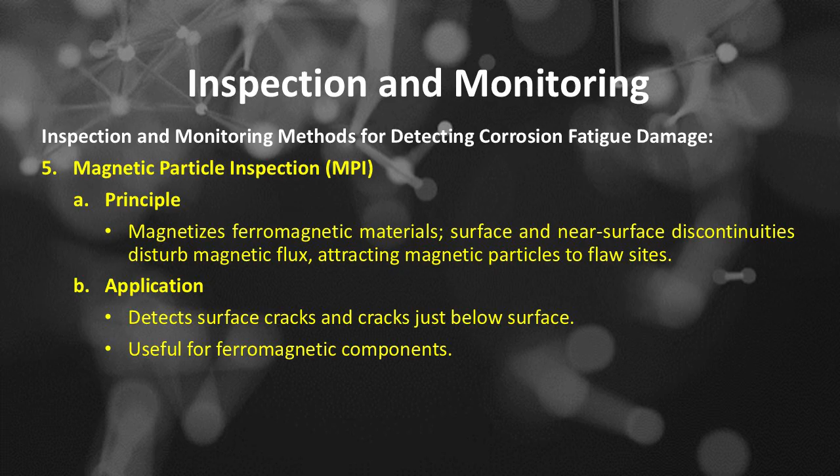Number 5 of inspection and monitoring methods for detecting corrosion fatigue damage is magnetic particle inspection, MPI. The principle of magnetic particle inspection is that it magnetizes ferromagnetic materials. Surface and near-surface discontinuities disturb magnetic flux, attracting magnetic particles to flaw sites. Magnetic particle inspection is applied to detect surface cracks and cracks just below the surface, and is useful for ferromagnetic components. The advantages of magnetic particle inspection include being quick and cost-effective, and sensitive to surface-breaking cracks. Limitations of magnetic particle inspection include being only applicable to ferromagnetic materials, and it cannot detect subsurface flaws deep below the surface.

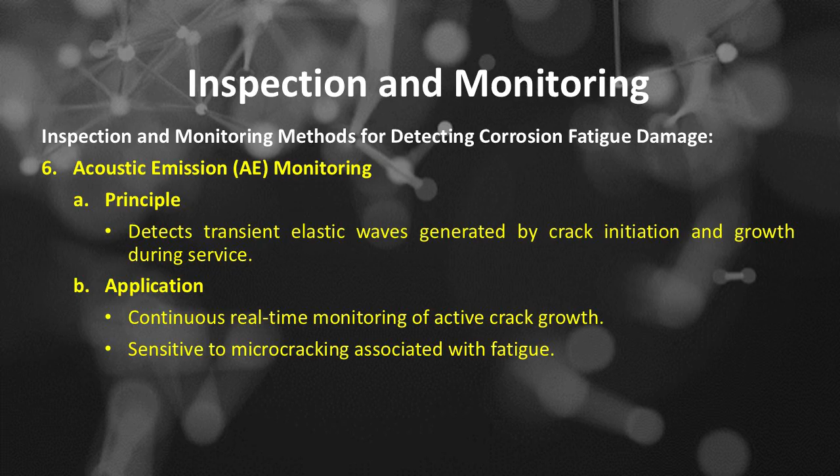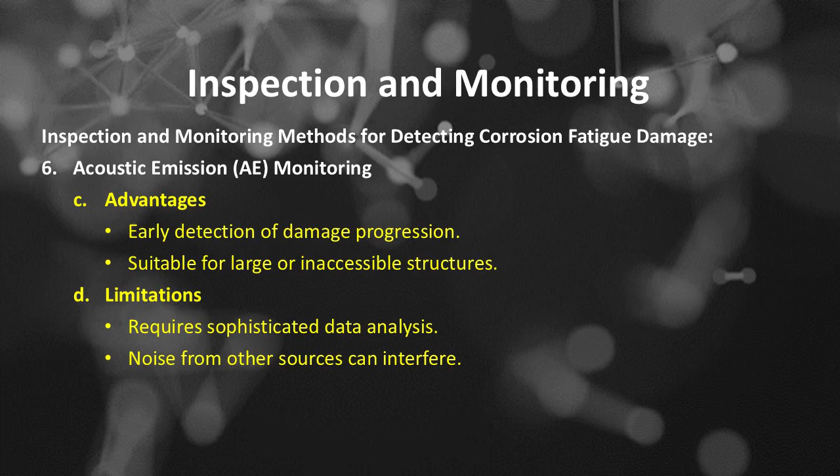Number 6 of inspection and monitoring methods for detecting corrosion fatigue damage is acoustic emission monitoring. The principle of acoustic emission monitoring is that it detects transient elastic waves generated by crack initiation and growth during service. Acoustic emission monitoring is applied for continuous real-time monitoring of active crack growth, and is sensitive to microcracking associated with fatigue. The advantages of acoustic emission monitoring include early detection of damage progression, and it is suitable for large or inaccessible structures. Limitations of acoustic emission monitoring include requiring sophisticated data analysis, and noise from other sources can interfere.

Number 7 of inspection and monitoring methods for detecting corrosion fatigue damage is fiber optic sensors and strain gauges. The purpose of fiber optic sensors and strain gauges is to monitor real-time strain variations indicative of crack development. Fiber optic sensors and strain gauges are embedded in structures during manufacturing or retrofitted, and detect localized strain changes due to crack growth or corrosion. The advantages of fiber optic sensors and strain gauges include high sensitivity and suitability for long-term monitoring. Limitations of fiber optic sensors and strain gauges include installation complexity and potential durability issues in harsh environments.

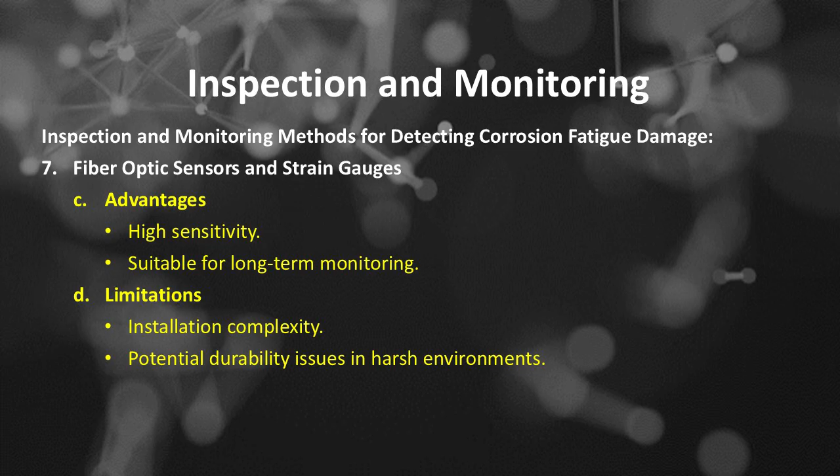Number 8 of inspection and monitoring methods for detecting corrosion fatigue damage is electrochemical monitoring techniques. Methods of electrochemical monitoring techniques are corrosion potential measurements, which detect changes in electrochemical potential indicating corrosion activity, and electrochemical impedance spectroscopy, EIS, which assesses corrosion rates and surface condition. Electrochemical monitoring techniques are applied to identify active corrosion sites that could promote fatigue crack initiation.

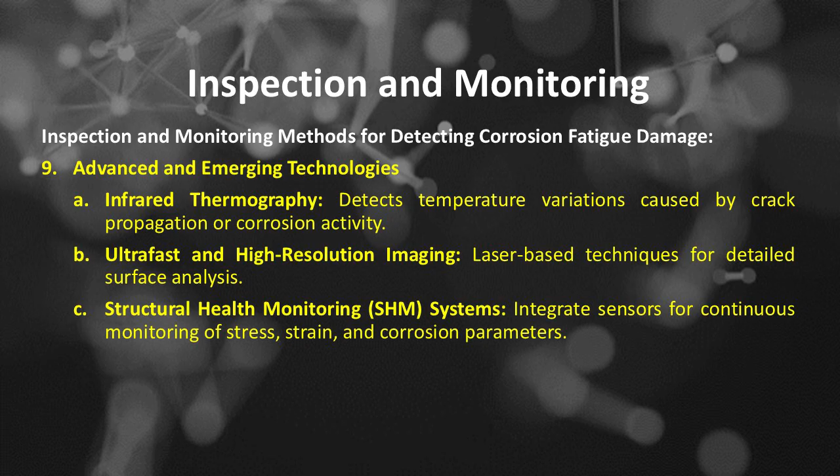Number 9 of inspection and monitoring methods for detecting corrosion fatigue damage is advanced and emerging technologies, which include infrared thermography, which detects temperature variations caused by crack propagation or corrosion activity; ultra-fast and high-resolution imaging, laser-based techniques for detailed surface analysis; and structural health monitoring (SHM) systems, which integrate sensors for continuous monitoring of stress, strain, and corrosion parameters.

Detecting corrosion fatigue damage effectively requires a multi-method approach tailored to the component's material, geometry, environment, and service conditions. Regular inspections combined with real-time monitoring systems enhance early detection, enabling timely maintenance or replacements to prevent failures. Thank you.